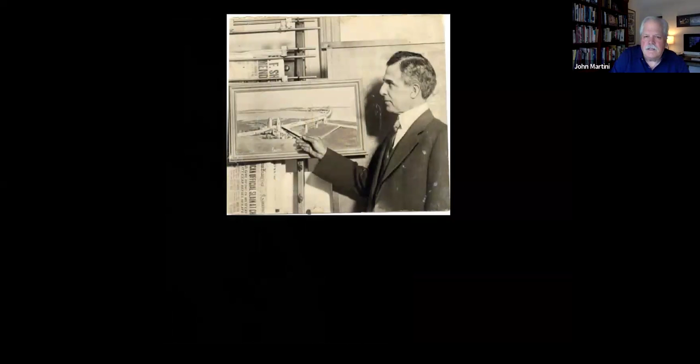Strauss and the Bridge District, they formed a bond district where the people of San Francisco and Marin and five other counties essentially put up their own real estate as collateral to sell bonds to construct the Golden Gate Bridge. Strauss went on like a barnstorming tour talking to church groups and Kiwanis and everybody else to sell the idea of voting in to create the bond district, to sell bonds to raise the money. It was anticipated to be over $30 million to build the Golden Gate Bridge.

And he also gathered with himself a number of other architects and engineers, sort of a dream team. It was just too much for one man to design on his own. So he brought in fellows by the name of Charles Ellis, who ran the never-ending numbers, the advanced math it took to build a bridge like this. John Eberson, architect, Irving Morrow, another architect, Clifford Paine, and others. I'm glad he did, because Strauss was very nuts and bolts.

He had built hundreds of bridges around the country, and this is the type of bridge that he built. This one still exists in San Francisco. It's called the Lefty O'Doul Bridge, or the 3rd Street Lift Bridge. And it's a counterbalance bridge to open and close to allow ships through. And it looks like something a kid would build with an erector set. It's very straightforward. It does what it does, but there's not a lot of delicacy or elegance to it.

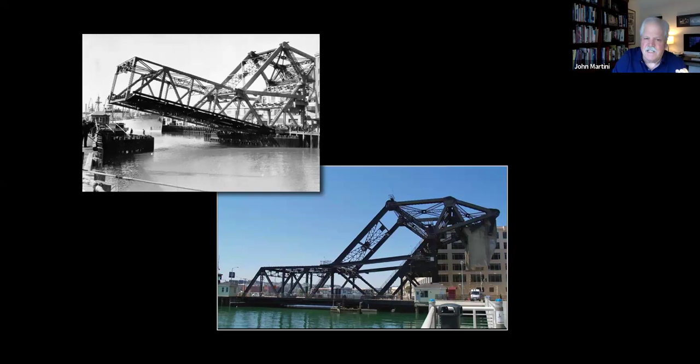And kind of reflecting this idea, this was the original 1921 proposal that Strauss put forward to build a bridge across the Golden Gate. He knew it was such a long distance, in fact, no one had ever bridged a distance this far before, that it couldn't be just a rigid girder bridge, a cantilever bridge. It would have to be, at least partly, suspension bridge. So he ended up with this proposal, which critics immediately pounced on. My favorite contrary comment was somebody called it an upside down rat trap.

The Army didn't like it. The Navy didn't like it. The Navy was afraid battleships would run into it. The Army was afraid that a bomb just at the right location would drop the whole contraption into the Golden Gate. So there was a lot of fiddling that went on with both engineering and also with ideas and proposals.

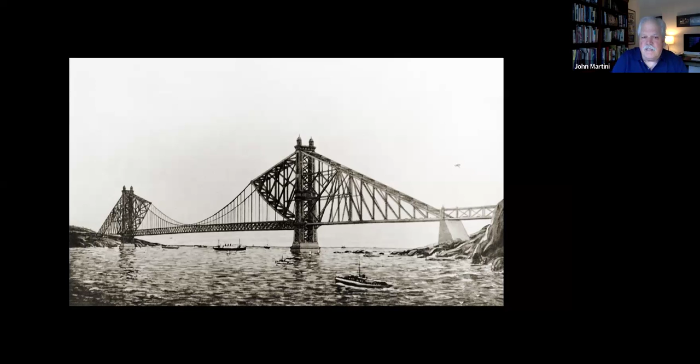And finally, Irving Morrow, the architect, working with the others, they came up with this concept. And this is what finally got people to accept the concept of a bridge across the Golden Gate. This was his 1930 proposal. It's no longer cantilever. It's a pure suspension bridge. It was going to be longer than any suspension bridge had ever been before, but they figured that it could be done. And with this moving forward, eventually a bridge district was formed, bonds were let.

One thing they had to overcome was there were 1,200 lawsuits by various groups opposing the Golden Gate Bridge, starting with the ferry companies. There were also concerned citizens groups, including the Sierra Club, who said that a bridge across the Golden Gate would destroy its beauty. There were other groups who contended that it was going to be a hazard because one geologist said it was going to sit on pudding stone. You get conflicting geologists. That delayed matters. Finally, the powers that be, the Corps of Engineers, the city engineer of San Francisco, the California Department of Highways, all the permissions were granted and work would begin.

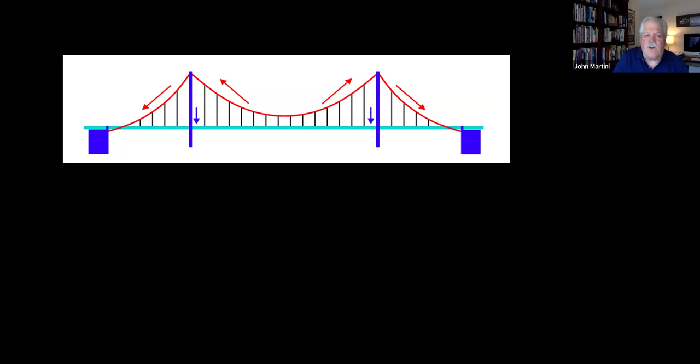Now, a deck on a suspension bridge can either be just wide enough for a person to walk across, or it can be wide enough for 6 lanes of traffic. And at the very far end, you can see the giant blue block. That's a big hunk of concrete buried into the ground that actually supports the weight of the bridge. The cables are holding the bridge deck in place, but the whole thing's going to collapse unless the far ends of those cables are attached to something that isn't going to move.

And when you apply it to the Golden Gate Bridge, the towers are 4,200 feet apart. The concrete blocks at either end, the bridge deck with its very slight arch, and the big cables, and then the little slender vertical ones. Those are called suspender ropes. We're going to get into each one of those as we go along. I call your attention to the tower on the left.

Earlier, I'd said there is a 350-foot deep trench under the Golden Gate Bridge. Yeah, it's right about middle span of the bridge, just to the right of the sailboat there. It's 350 feet deep. One of the big challenges was building the tower on the left, what's called the San Francisco Tower. It's actually in the open ocean. The water there is about 100 feet deep. But just to the right of where the tower is, the chasm starts. That's as far to the north into the open ocean as they could build the tower and still be able to put its footings on the bottom. Any further than that, and it would have been impossibly, insanely deep to build the bridge.

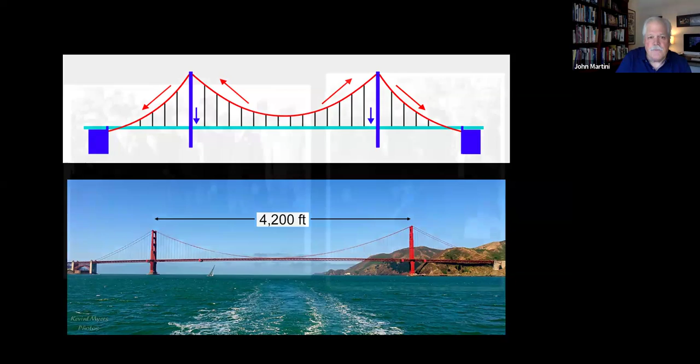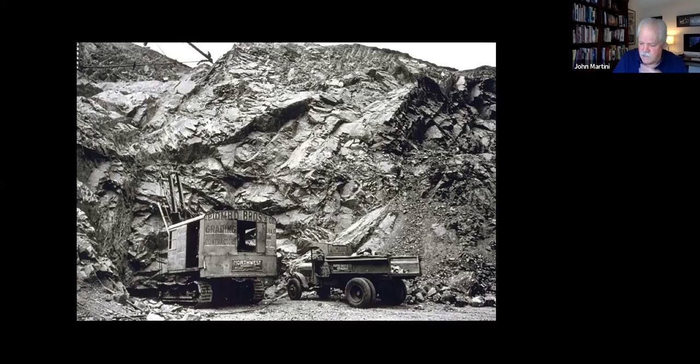This is on the San Francisco side. If you look closely towards the bottom, you can see there's a series of parallel lines. Those are actually giant carved serrated teeth that were chiseled into the natural rock. And when the concrete is poured into that hole, the concrete is going to mesh with the teeth, and the whole weight of the bridge is going to be pulling against the concrete block, and it's also going to be pulling against the earth itself. The bridge is well anchored.

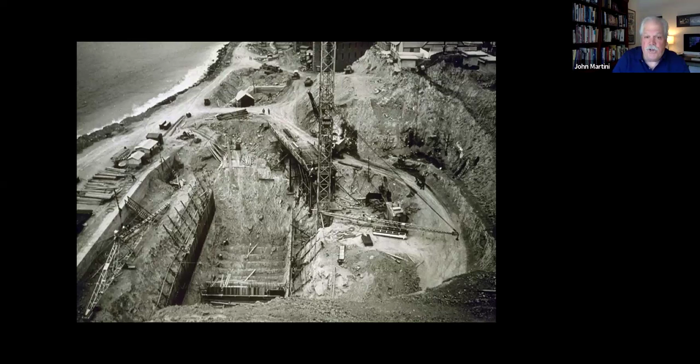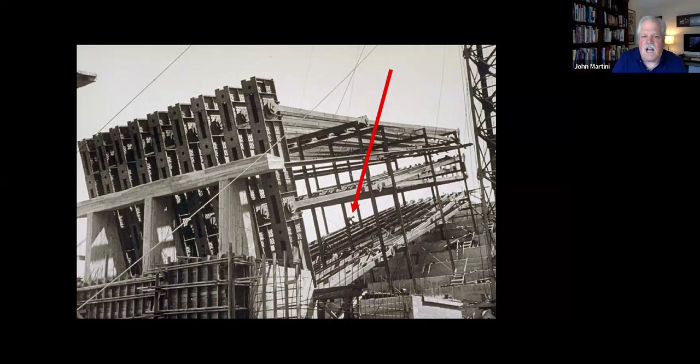View of the concrete anchorages being built, this time on the Marin side. I'll give you an idea of the scale of those two blocks that you're looking at. This is the ironwork that is going to be encased in solid concrete, and the red arrow shows the size of a workman. Each of these anchors, and they were identical, just mirror images of each other, they were steel I-beams, steel girder construction, 60,000 pounds or 60,000 tons of concrete were used to encase the entire girder section.

And when it was finished, the block was bigger than an apartment house. And that'd be solid concrete. That's what it takes to hold the Golden Gate Bridge up. Those, they called them the eyebars that are sticking out on the left. Later on, we'll talk about that's where the cables actually attach.

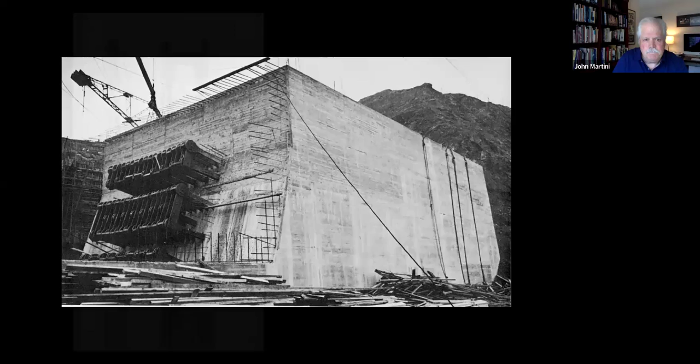Now, the first thing that was built were the towers. They began with the tower on the Marin side first because it was going to be the easiest to build. And the design shows that the bridge towers were built not just for function, but also with artistic intent. Partly this is a response to the people that were concerned the bridge was going to destroy the beauty of the Golden Gate. Well, the architects decided on the Art Deco style.

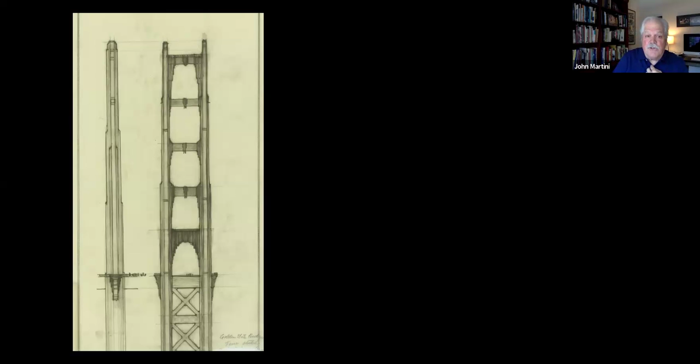If you look, it's got 1, 2, 3, 4, 5 big openings. Those were called portals. And you can just make out little teeny cars on the bridge deck. Below the deck where the X bracing is, that really wasn't going to be visible. It was above the deck. That's where the Art Deco detailing took place. In fact, the whole bridge was going to be sort of a showcase for then popular Art Deco styling. Many aspects of the bridge were going to get a similar treatment, like the administration building that was never built. And there was even going to be a giant Arc de Triomphe type of approach to the toll plaza. This is something that would have warmed Mussolini's heart.

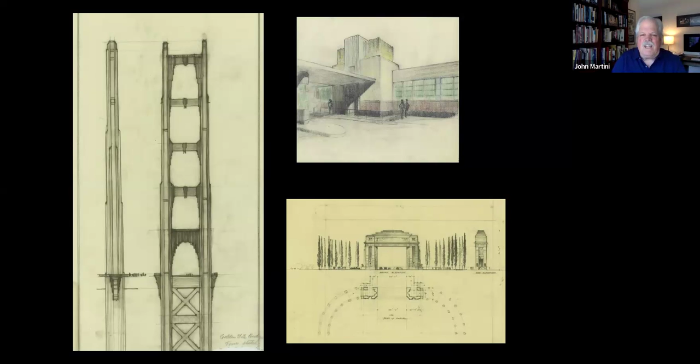Fantastic architecture. It got cut. They had a budget to meet. $35 million was what they'd raised to build the bridge. So some of these details just didn't get included. And even the architects later on said, we didn't really need it. The bridge looks better on its own.

To build the first tower, the one in Marin, it was essentially built on the shore of Marin County. They just built a cofferdam around the beach, pumped the water out, excavated to bedrock, and built a big concrete block. The flat areas with the bolts sticking out, that's the imprint of where the towers are going to be located. Everything was planed to less than 1/32 of an inch flat.

And the bridge towers were built prefab on the East Coast in Bethlehem, Pennsylvania. The sections were raised into place by traveling cranes or derricks that slowly made their way up the tower legs as the sections were slipped into position. That was a big realization to me. I thought that they were slapping together steel plates from the get-go. No, big sections of it were prefabricated, put on ships, came through the Panama Canal, offloaded in Oakland, and brought to the site either by rail or by barge.

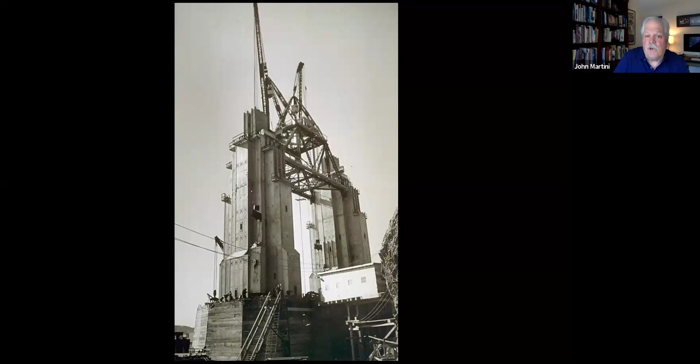A section of one of the bridge towers being slung into place. The bridge towers are hollow. They can actually move quite a bit in an earthquake or in a high wind, about 7 feet from side to side. And the interior, although it was partly riveted together, they still had to do the final riveting. So riveters working from the inside of the tower, in what were called the cells, and from the outside, riveted the plates together.

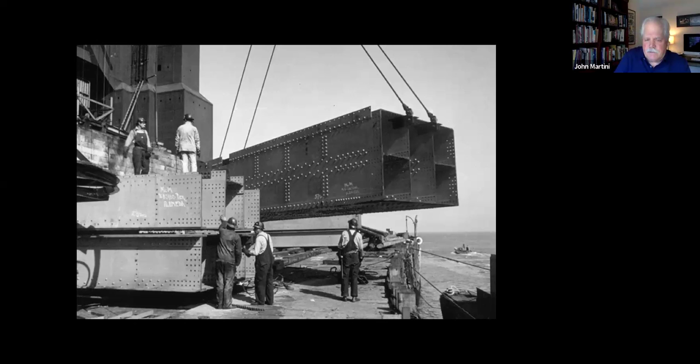If you don't know what riveting is, you have 2 sheets of metal, and you stick a red hot piece of metal, the diameter of the hole, through the opening in the 2 steel plates. While it's red hot, it's still malleable. You can form it. So you use what's called a rivet gun, pneumatically powered, to smash down the head of the rivet. And when the rivet gun is pulled away, the whole rivet cools, and it shrinks ever so slightly, and it pulls the 2 pieces incredibly tight together. 600,000 rivets in each tower had to be hand driven like this.

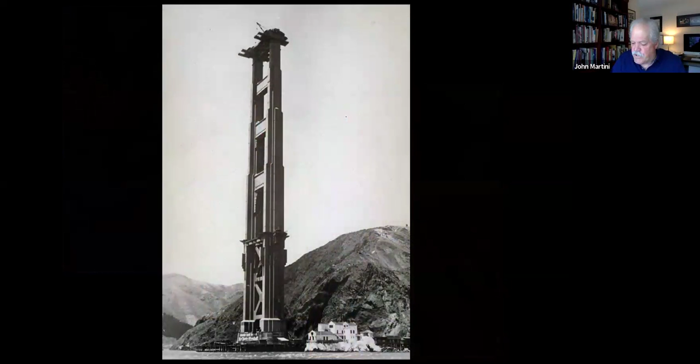The first tower, the Marin Tower, was finished in 15 months, May of 1934. Now, in this picture here, at the very top, see the traveling cranes? They're about to dismantle themselves and lower themselves down to the ground, where they'll be brought by barge to the San Francisco side, where they'll be reassembled to build the next tower.

At this point, they're thinking, well, as the metal goes up, we've got to paint it. What color is the bridge going to be? Some designers said, well, a lot of bridges are being painted aluminum silver, how about we paint it silver? Other folks said, no, traditionally you paint them carbon black, like a railroad bridge.

Irving Morrow looked at the metal as it was being assembled, and it came in a reddish brown primer, red lead primer, we call it today. And the color was so good looking and it worked so well with the hills and the blue skies that he said, let's just formalize that into a top coat. Let's not mess with success. And they formalized it as what was called International Orange paint. That's the color of the Golden Gate Bridge. That's like primer red.

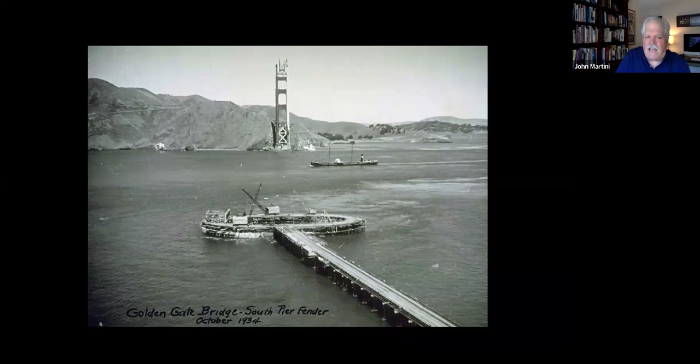And then they started working on blasting the bottom of the Golden Gate flat. The way you did that was you sent divers down, hard hat divers. They would go to the bottom working almost blind because it's so dark down there, cold. They only had 20 minutes to work at a stretch between tide changes, or they'd be pulled off the rocks on the bottom. They would set charges. They would then be lifted to the surface, charges detonated, then they'd go down and direct scoops that came down and lifted the rubble.

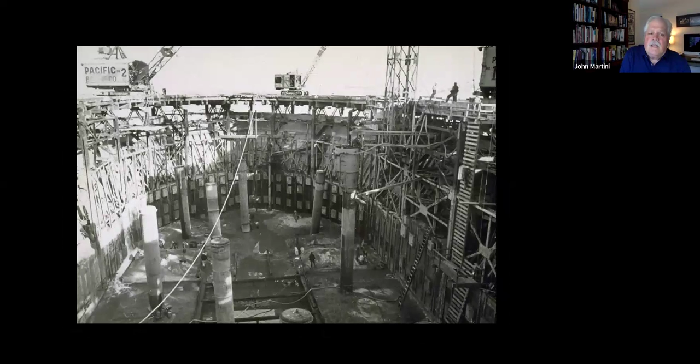Finally, they flattened the bottom of the Golden Gate large enough to start building a giant cofferdam. To get an idea, look at the cranes at the top and the workmen standing up there, and even at the bottom, the little teeny ones; it's the size of a small football stadium. The walls were 20 feet thick. It's built in the shape of an oval. And when it was finished, the water was pumped out and they could build the bridge tower in the dry. And that's what they did.

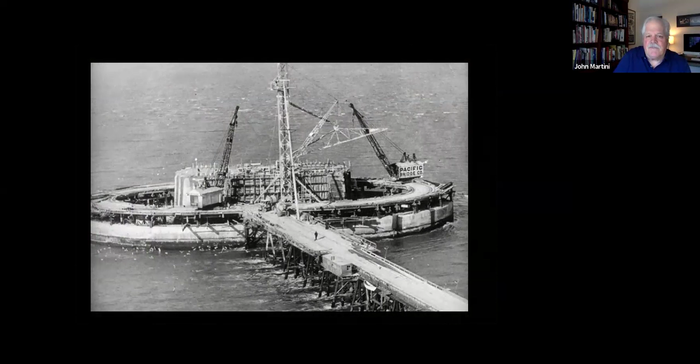You can see in this case the cofferdam with walls which are 20 feet thick. The bridge tower base is finally rising up. This is more of a clarified view. The cofferdam was left in place, the concrete fender wall, 20 feet thick. This is what protects the bridge from actually being hit by a passing ship. We have a classic example of what happens when the towers aren't well protected on the Francis Scott Key Bridge in Baltimore, which as we talk is still being demolished after a freighter ran into it. It has never happened to the Golden Gate Bridge.

This particular view, time progressing, this is January 1935. The cranes are working their way up and they're building now what's called the San Francisco Tower or the South Tower. And the construction work is still continuing on land where they're finishing up the big anchor blocks on the San Francisco side.

Now, who were the guys that built the bridge? And I say guys because it was strictly men. Everything I've read, I've never found any women who worked actual construction on the bridge. Clerical and support, yes, but on the steel, in the concrete, no, it was guys. And they came from all over the country because San Francisco didn't have a history of building high rises or big bridges. So the high steel workers came from out of state. A lot of them, Chicago, New York. Yet they were supposed to be from the Bay Area.

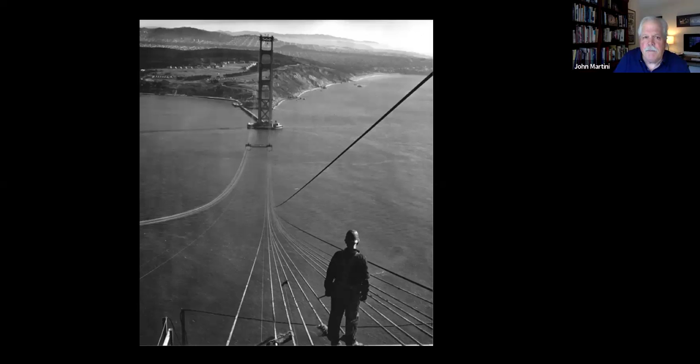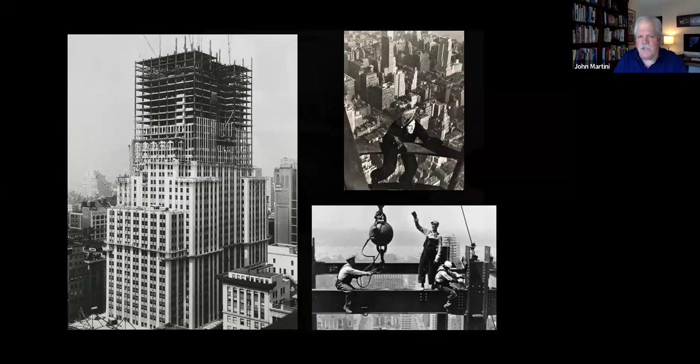Joe Strauss was not going to let safety be an afterthought on the Golden Gate Bridge. He insisted on an extremely high level of safety and safety gear. It was the first job where it was mandated that everybody was going to wear a hard hat. These hard hats were actually layer after layer of leather, stiffened with some sort of varnish. And because they were hats that had been hardened, they were called hard hats. And the name stuck. Miners had used them previously, but a requirement that everybody on high iron wear them, the Golden Gate Bridge was first.

The respirator: they found out that the guys working riveting inside those tower cells were being overcome by lead fumes from the red lead paint primer that was burning off. The light, for working inside the confines of the towers, where guys actually got lost.

What he doesn't have on here, because he's going to be working in a tower cell: the guys who worked outside were required to wear skin cream to protect themselves against sunburn from sun reflecting off the San Francisco fog. And Strauss caught some flak for this, but this was a very important investment.

He spent $150,000 building a jute net underneath the bridge. This net was designed to catch guys falling off the bridge. And they did. 19 guys fell off the Golden Gate Bridge during construction and were saved by falling in the net. They called themselves the Halfway to Hell Club. A very elite group.

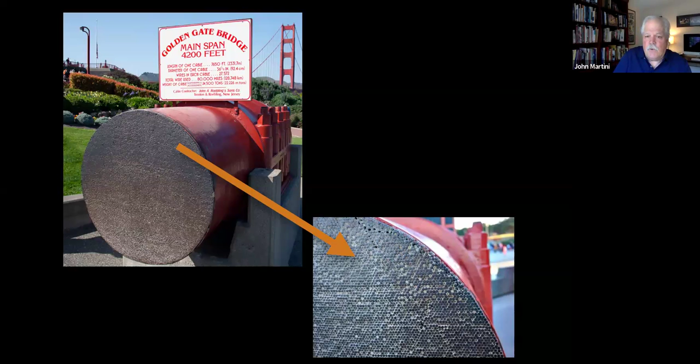These little guys were carried across the Golden Gate, the first pair, by boat, and then they were hoisted to the top of the towers, and then they served as the basis for trolleys or shuttles that followed the preceding cables back and forth, each time laying down another cable. They were called spinning wheels because they were spinning the Golden Gate Bridge cables.

Now, they figured this would take forever because it took 13 minutes for each cable to cross, and 13 minutes times 27,000, that's going to be forever. So eventually they figured out, well, if we can put one wheel on the trolley, how about we put two? How about four? How about six? And eventually they were spinning it so fast, they were able to finish spinning the cables in only 2/3 of the time allotted.

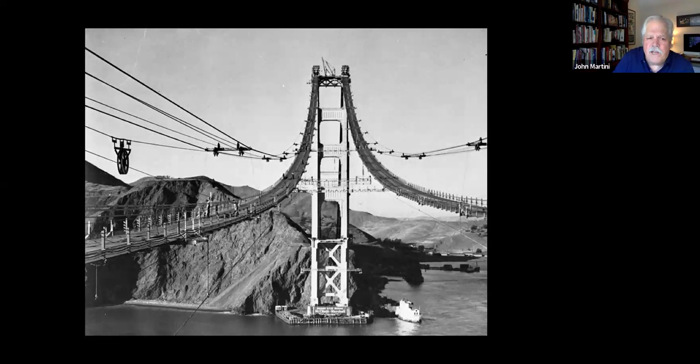Now, the temporary wooden catwalks underneath, those were for the workers. Those were built on some of the earliest cables that were spun across. Again, walkways with safety railings, safety, safety, safety. Bridge workers at either end put the cables on, and then when they finished their 13-minute crossing, another crew took them off.

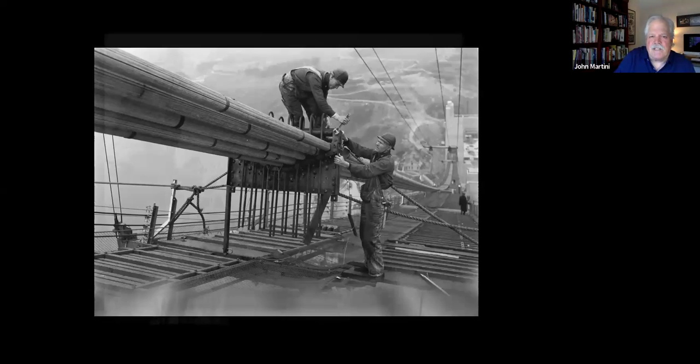And then when the cables were finally stretched out, they were bundled together into smaller, manageable cables. And then these smaller bundles of cables were compressed by a movable hydraulic press that squeezed them into a circular cross section of 36⅜ inches exactly. And right behind this machine, after it's compressed them, they wrapped the bundles of cable tightly in an outer layer of cable, and then they were painted tight.

The bridge is currently undergoing a lot of work to rehab it. I mean, it's an old structure now. And one thing the engineers were concerned about: 5 years ago, they unwrapped one section of one of the heavy cables to see what the steel is like in there. You know, the bridge is rusting in many places. How are the cables doing?

And the engineer that I talked to said when they unwrapped the test section, the steel was still brilliant shiny, the same way it looked when FDR was president. So they said we're fine here. They rewrapped it and they moved on to other areas that needed more intense protection.

Any buildings that were destroyed during the construction of the Golden Gate Bridge had to be replaced, or the Army compensated. And also, this really frustrated the military: there had to be traffic allowed through the Army posts to get to the bridge.

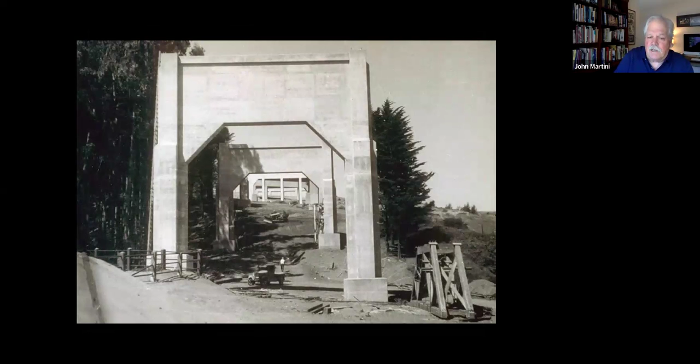Well, the Army said, build a freeway, an elevated freeway to cross the Presidio of San Francisco. And that way we won't have to have traffic plugging up the streets on the Army post. An elevated freeway stretching from the Marina District to the bridge was constructed.

Anyone from the Bay Area remembers the old Doyle Drive. That was a gnarly freeway, very dangerous to drive. And it has since been replaced. But in its original configuration, there were no off ramps. The Army didn't want tourists tooling around the Presidio Army post. They just want, get to the bridge, pay your toll, cross, leave us alone.

On the other side of the Golden Gate Bridge, Highway 101 was constructed by the state of California, snaking over the hills of Fort Baker and down to Sausalito. I mentioned earlier the Army had to be compensated for any structures that were demolished or had to be moved. Well, right in the foreground, there's a line of big concrete bunkers going back to before the Spanish-American War, harbor defense, coast artillery installations, and these were in the way. And the Army said, okay, you can demolish or bury them as you see fit.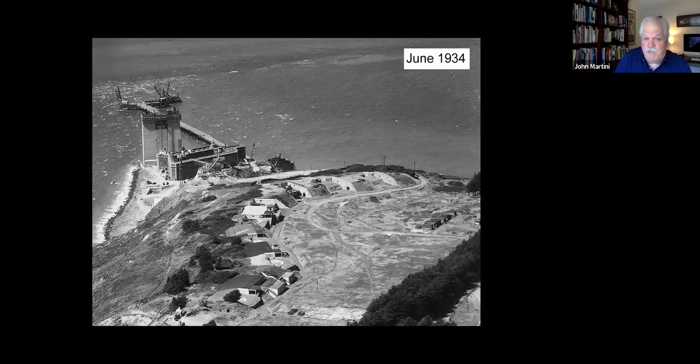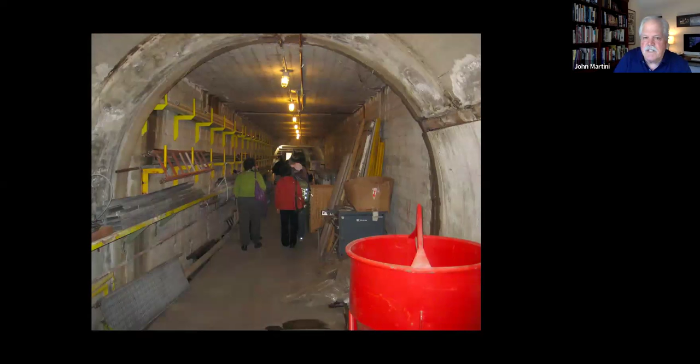And the bridge district did build other fortifications elsewhere, but directly below where the toll booths are, there are still a labyrinth of underground tunnels and ammunition storage magazines left from the old bunkers. Now what are they used for? Storing big barrels of international orange paint. It's where the painters hang out.

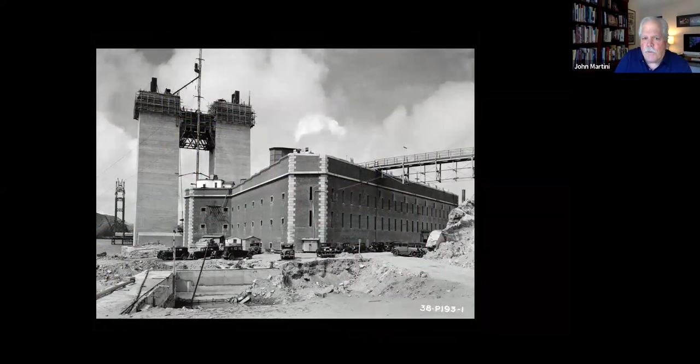This is Old Fort Point, constructed during the gold rush on the eve of the Civil War, right in the way of where the giant concrete block was going to be located for the San Francisco anchorage. Joseph Strauss did not want to demolish the fort, partly because it's its own engineering marvel for the time period, and it was historic, and also they'd have to recompense the Army for the demolition and the loss of storage space. The fort was a warehouse.

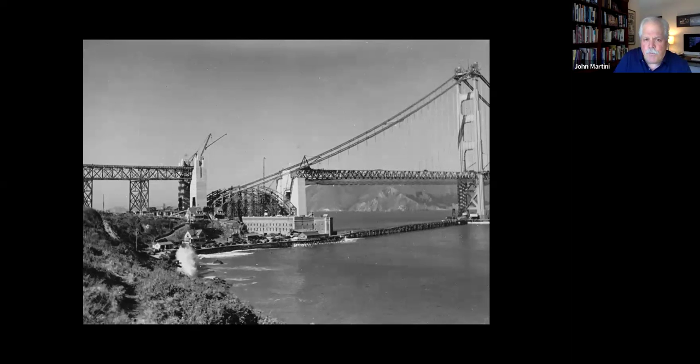So what Strauss did was they tweaked the design of the bridge, and they designed a giant arch to jump over Fort Point. And it's one of the identifying qualities of the Golden Gate Bridge today, the giant arch, purely to save Fort Point, which became a National Historic Site managed by my former agency, the National Park Service, in 1970.

Towers were up, the cables were spun. The last part was putting up the traffic deck, the bridge deck. And like the sections of the tower, these came prefab. Cranes lifted them into position from barges floating below. And these smaller diameter cables, what are called suspender ropes, were looped over the heavy cable, and they were attached to the bridge deck. They're called suspender ropes because they actually suspend the deck from the cables.

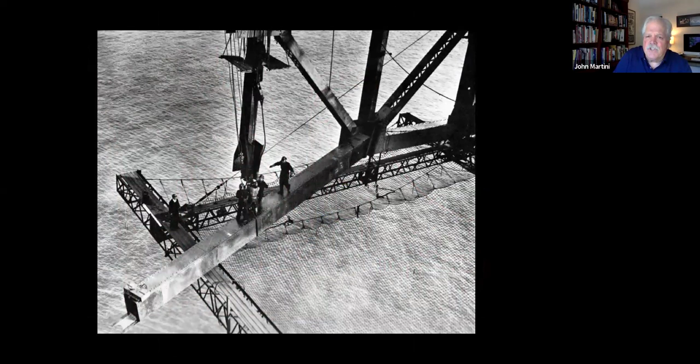Bridge workers hauling up, riveting, bolting, good shots also of the net. By 1936, the two ends are approaching each other. They worked from both ends towards the center to spread the weight out. There were people that were opposed to the bridge in the first place. And when it got to this stage, you had people saying things like, those idiots have no idea what they're doing. Bridges aren't shaped like that. The two ends don't even meet.

The engineers knew what they were doing. They knew that the tensile strength of the steel would allow it to expand as it stretched. And as more of the bridge deck was added, the more the big cables stretched until the two ends, when they met up at mid-span, meshed perfectly. One account said the rivet holes weren't exactly lining up. So they waited for the day to warm up or cool down until the steel expanded and contracted. And the moment the rivet holes lined up, the bridge was essentially done.

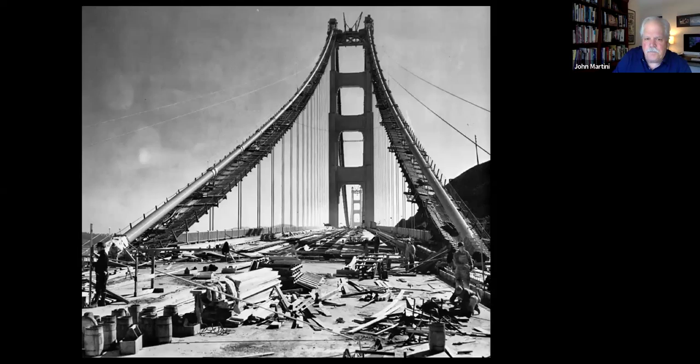Endless laying of concrete. There's enough concrete in the Golden Gate Bridge between the traffic deck and the anchorages to build a 5-foot sidewalk from San Francisco to New York City. The Bridge District built its own concrete batching plant, fleets of cement mixers.

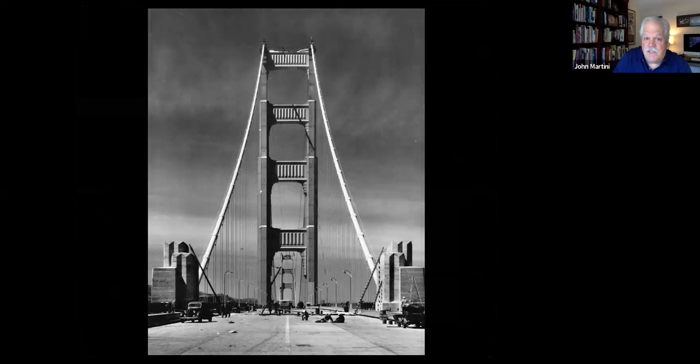And sometime in early 1937, they started to pull down all the scaffolding and the cranes, and the bridge started to reveal itself. And people, especially in San Francisco, were amazed. They were impressed, the old term gobsmacked, by how beautiful it was. They'd seen the pictures, but to actually see it, it was decided, we got to have a party.

And they decided to celebrate at the end of May 1937 by having a grand carnival in San Francisco called the Old West Days. And parts of the city were turned into false front saloons and bars and boutiques, and people dressed up as cowboys and wore what we'd now call culturally insensitive clothing like Spanish caballeros.

And a date was set, May 28th, when traffic was going to be allowed across the bridge. That was going to be the great opening. And I don't know who came up with the idea. They said, let's let the public have a day on the bridge before it's open to traffic. They'll never have this opportunity to see it again. They declared the day before, May 27th, to be Bridge Pedestrian Day.

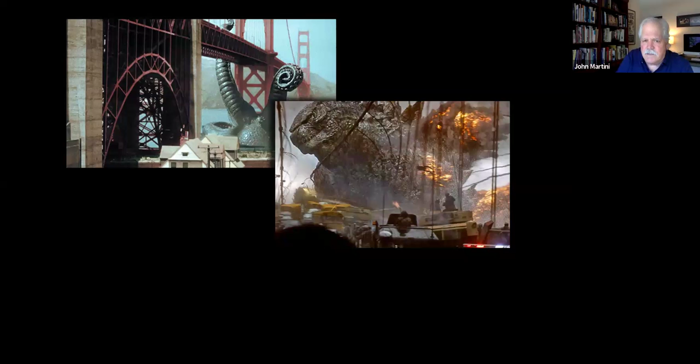And then get to the 2000s, Godzilla simply walked through the Golden Gate Bridge. He must have been mighty tall to have reached that high when he's walking in water 350 feet deep, but it's Hollywood. And then my favorite is when it was taken over by really irate primates in the original Rise of the Planet of the Apes in 2011.

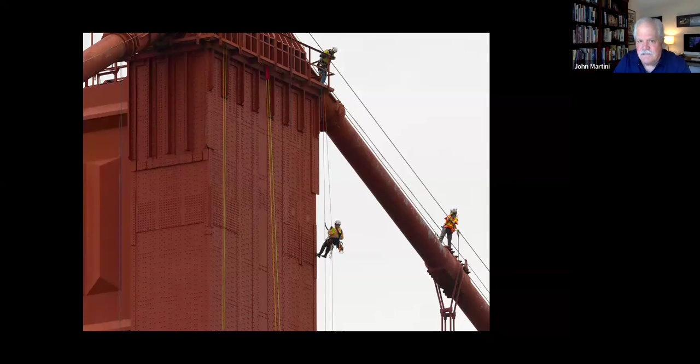And another big project going on is on the macabre side, is the bridge is attractive to people that want to end their lives. So they're just wrapping up installing a suicide net underneath the Golden Gate Bridge. This isn't like the net with all the springiness in it when the bridge was constructed. This is rigid cyclone fencing coated in plastic. So if anyone jumps off the bridge, they're going to go maybe 20, 25 feet down, land on this, and it's unforgiving, but they'll survive until we can get them the help that they need.

Idea being that probably no one who wants to commit suicide wants to go through the bone-crushing experience of landing in that net and then trying to climb to the edge and take another drop. Numbers are still early, but it seems to be having an effect. Suicide numbers are down on the bridge.

So the bridge, it's an icon, and to me, it's timeless. There have been changes to it. They've changed what the lights look like. They've put the suicide barrier up. The bridge approaches are being, but compare the bridge to 1937 to today, it continues. It's been part of generations of San Franciscans' lives. I tell people, if you're not from San Francisco, be sure to walk across the Golden Gate Bridge. If you're from San Francisco and you haven't, do it. Walk across the bridge. It's ours. It's our home.